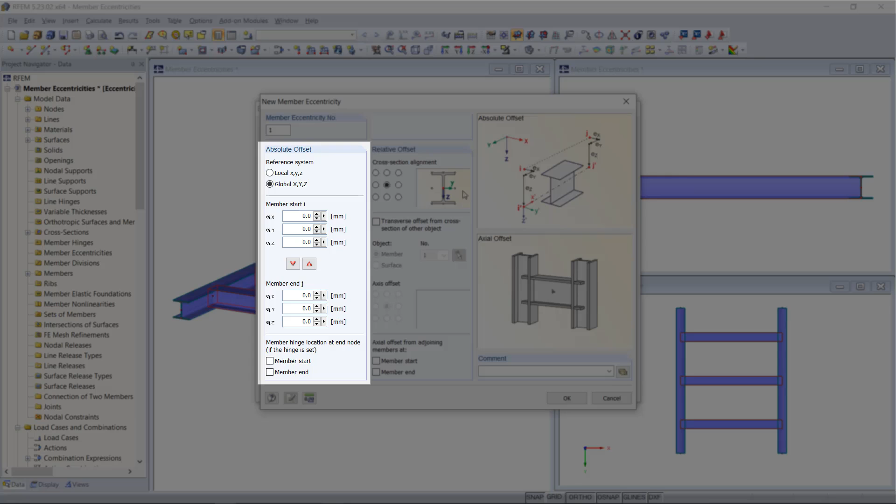Up here we can find in the Options tab Member Eccentricities, and if we click on the right side here we will enter a new dialog box to create a new eccentricity. So basically we have two options. We can set either an absolute offset or a relative offset.

With the absolute offset we can manually enter a certain value, for instance in reference to the global axis, as the absolute distance to the previously used system lines. Let's say we want to move the members upwards in the global z direction, so we just have to enter an eccentricity, for instance of 200 millimeters for both the member start and end.

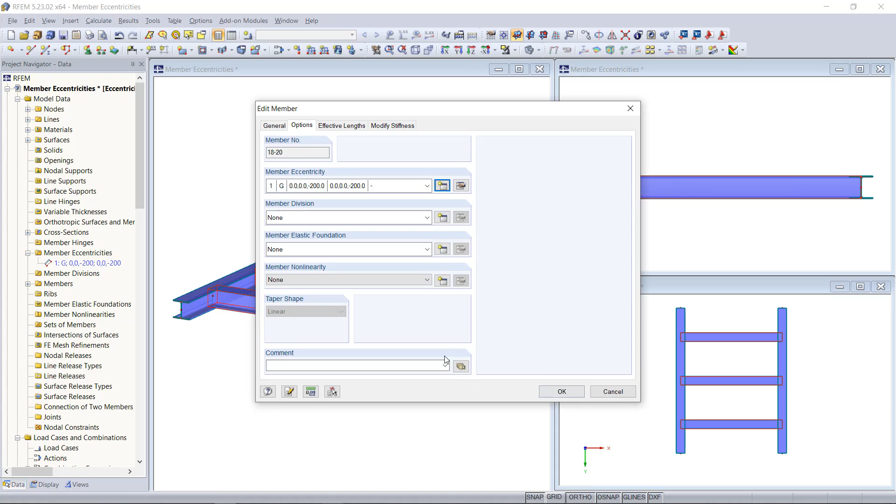Then we click OK, and now if you have a look here at the side perspective, if I click OK once again, the beams are getting placed upwards. In the wireframe model we can see that even better, so here you can see the connection.

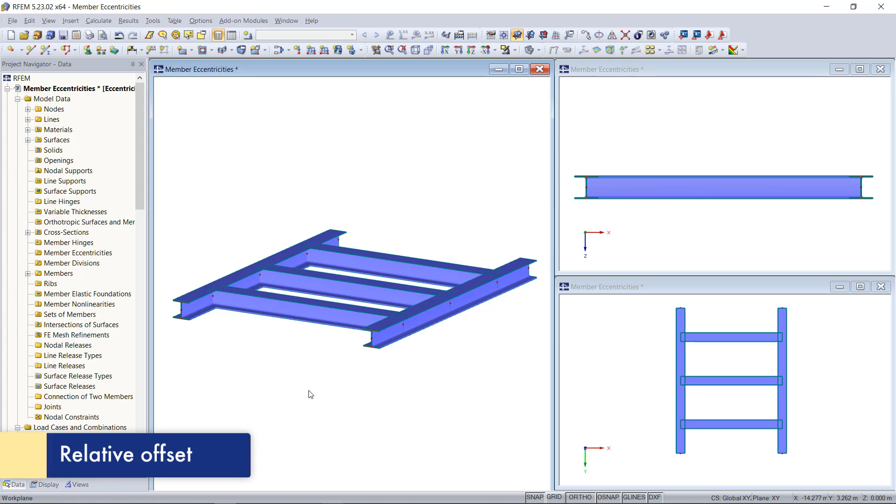The option relative offset allows us to create eccentricities for certain members depending on adjacent members. For the case that these members here in the middle should be flush with the other two beams on the right and left side, we can use this option. We can also enter the dialog for eccentricities directly using the project navigator. With the right click on member eccentricity, and then we choose new member eccentricity.

So by defining the point in the middle of the top flange, as shown in the figure on the right side, we can attach the middle beam members with their top edges to the other beams. So we click here on transverse offset and then choose the reference member out of the model, and then as axis offset we select the middle point down here.

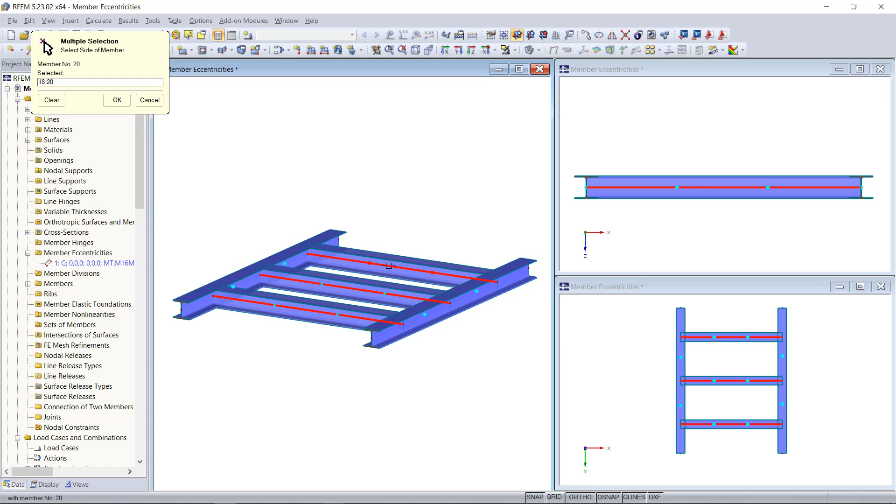So right now we have created the eccentricity, and as a next step we have to assign it to the members. We can do this with right click and then choose assign members graphically. In order to select the entire beam member, try to click in the middle of the members, like here, and then we click OK once again. So as you can see, the beams are automatically moved and we've just created a flush connection between the members.

It's also possible to edit the eccentricities if we right click and then choose edit. Let's say this time we need that the bottom edges are connected to the top edges of the other members. Then we click OK once again.

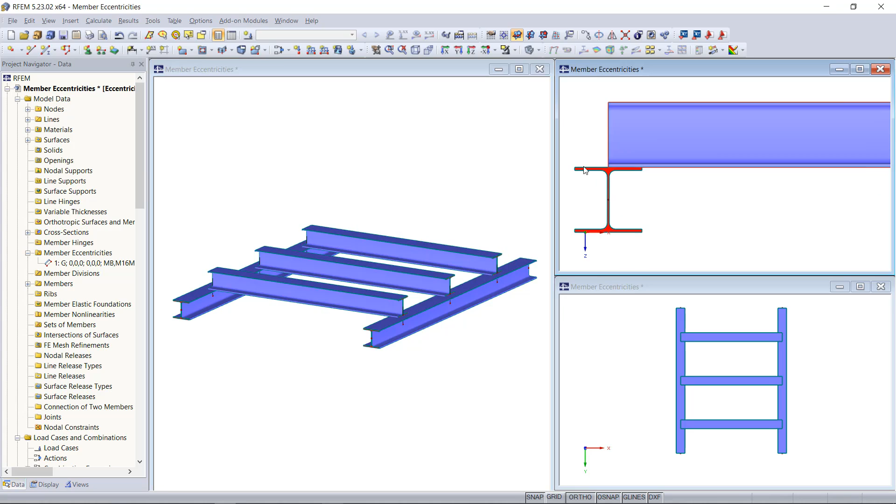In the relative offset dialog section, there is additionally the option of axial offset down here, which allows you to connect members eccentrically to the flange of members. If we want to have this for both sides, we have to click both member start and end. Now have a look at the top view, so the members are connected flush on the edges.

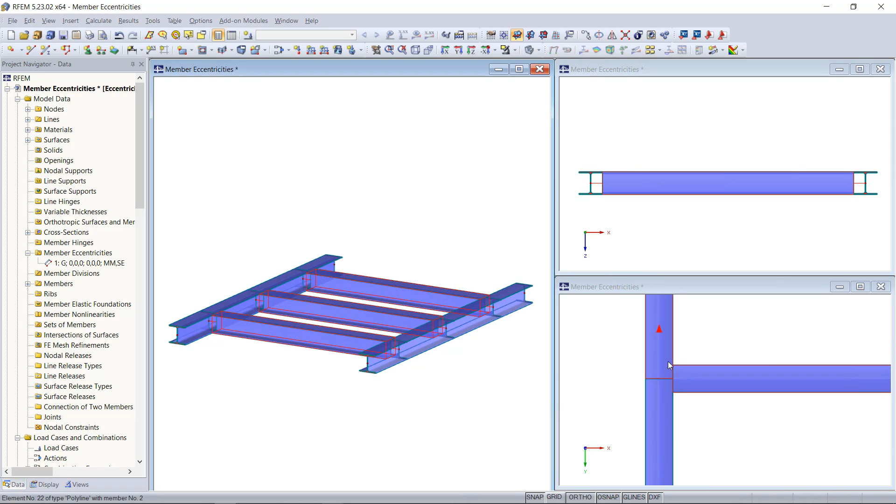We can not only create eccentricities between members, but also for adjacent surfaces. So as you can see for this model, the top edges of the two beams here should be connected to the bottom edges of the surface. So for this, we basically have the same procedure.

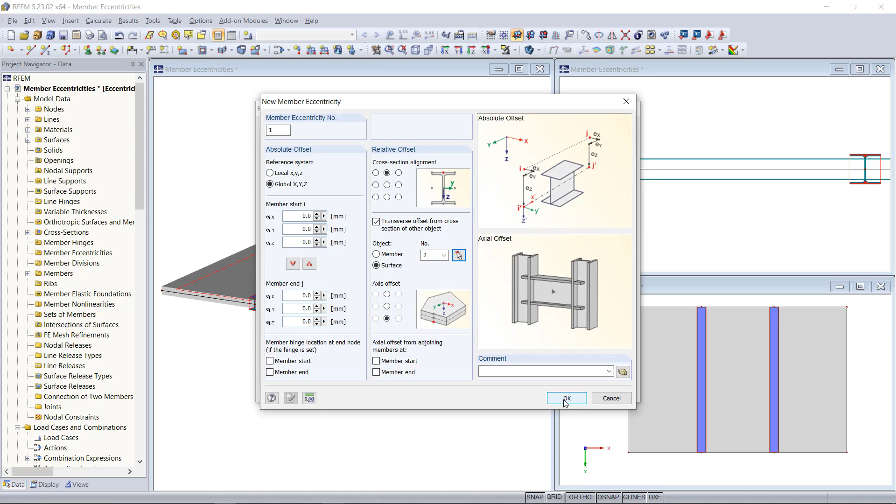And instead of member here, we choose surface. Then we are going to select the surface out of the model, and as axis offset we select the bottom edge down here and click OK once again. Now we have also a flush connection between members and the surface.

As the last part of this video, I also want to show you what you have to consider during your calculations. For that, I've prepared a very simple example. You can see here two beam members. The first one has an eccentric connection here at the supports, and the second one does not.

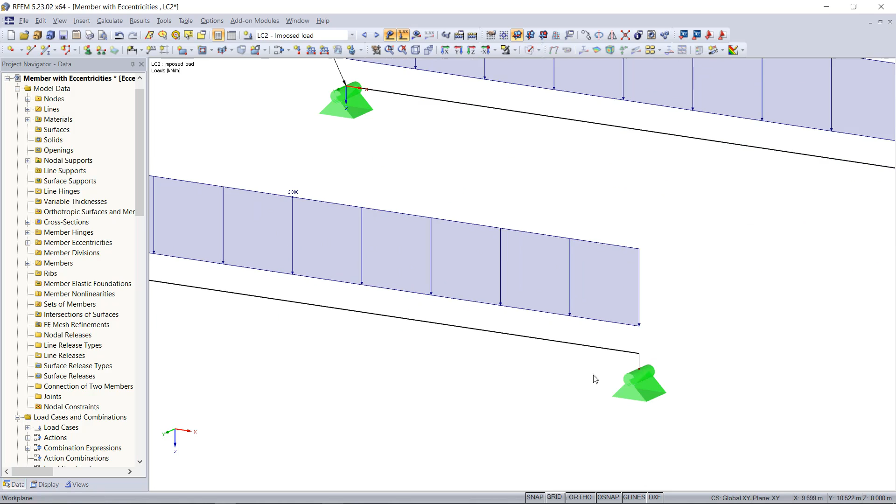I've applied for both members a member load of 2 kilonewtons per meter, and we'll run the calculation for this. If we have a look on the results now, you will notice that the first member has boundary moments and the second does not. So this is caused by the eccentricity, as in the background a connection to the original node is created. So please don't forget to consider this point.